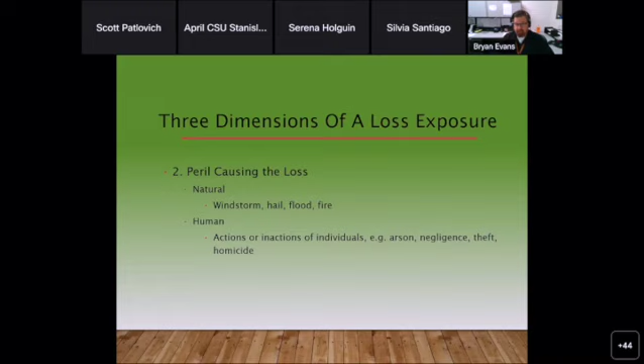And then the third dimension, what's the financial consequences of the loss? What's the frequency and severity of the occurrence? One rule of thumb is that typically the more severe, the less frequent that it happens.

So the second step is to look at your risk management alternatives. You can look at doing a risk control or a risk financing method. So risk control, you can find a way to just avoid the exposure altogether, or to reduce that loss. Some companies will separate their exposures, especially large companies.

One that comes to mind is Toyota, where they have different manufacturing plants in different parts of the world. So if one plant goes down, they can easily start up that other plant, so they're not totally out of business.

Risk financing: you can retain your losses, expensing them as they come up through either an unfunded reserve or a funded reserve, which for a few years we actually had. With my detailed spreadsheets showing every single loss that's happened, we were able to determine what our average retained losses were for each year.

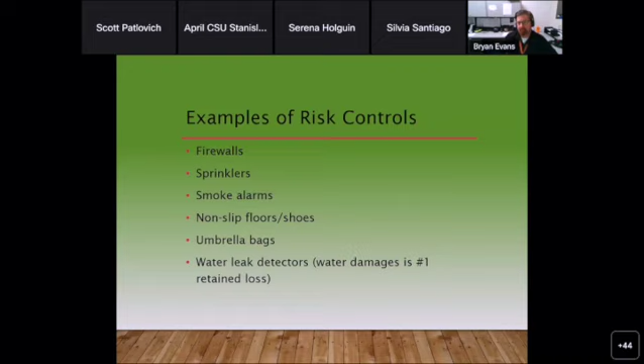These water leak detectors aren't just a local alarm—they actually call and text people that something's happening, so someone could have got to that building and shut the water off.

Okay, so types of insurance and coverages: some of the basic ones you have are commercial property, boiler, machinery, crime, general liability, business auto, workers' comp, D&O which is directors and officers, and employment practices liability. At the end of this presentation I have a graph showing how big or small each premium is of those.

Okay, the third step is selecting the best alternative. How would you go about that? You would look at financial criteria. There's a lot of other criteria to look at—what's best for your people, what's best for the bottom line—and then applying that criteria through risk control and risk financing.

The fourth step is how to implement. When to implement is a big part of it too. Do you do it over the summer when not many students are around? Do you do it during the holidays when no one's around?

And definitely you have to think about communication. For example, you can't just go self-insured on a policy without letting a lot of people know, and of course letting them know why you would do that.

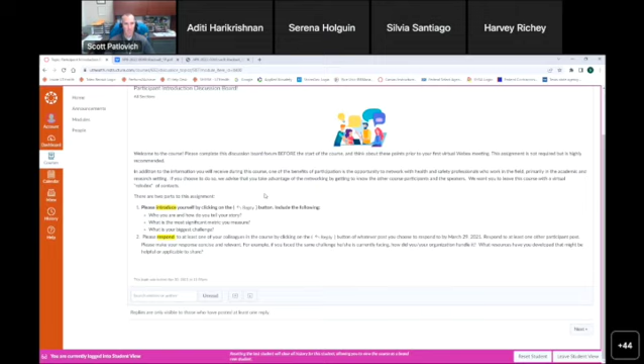Go back one step. If you go to the participant introduction discussion board, you can actually put an introduction here and introduce yourself. Just tell us a little bit about yourself, where you're from, and something fun about yourself. It'd be a good way to get people to know each other.

By the way, we have participation from folks across our UT system institutions. We have participants from the Texas A&M system, the University of Vermont, and many institutions within the California state system and others. I wanted to make sure you guys all got to know each other a little bit. So please do some introductions on the Canvas webpage so people can get to know you, and we don't leave here empty-handed in terms of adding to your Rolodex.

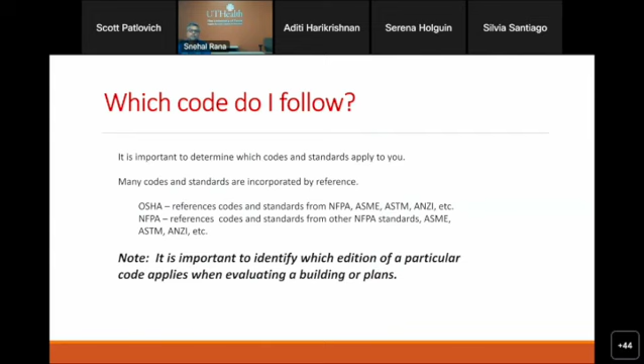So how are codes enforced? Codes are important to keep everyone, property and persons, safe in the areas that you're in. Many codes and standards are adopted or incorporated by reference by the AHJ, or authority having jurisdiction. Here on campus at UT Health Houston, we, EHS, are the authority having jurisdiction, so we have the final call on a lot of these codes.

Remodeling or new construction plans must be approved by the AHJ prior to starting work. It's a very important process when you have construction that you are working closely with any new construction or remodeling to make sure that they are staying within code. A lot of contractors are trying to complete whatever project they're working on in as quick and efficient a manner as possible, and sometimes that means circumventing code. That means they may not take the additional time to turn a sprinkler head the right way or make sure a wall is placed appropriately to provide adequate sprinkler protection.

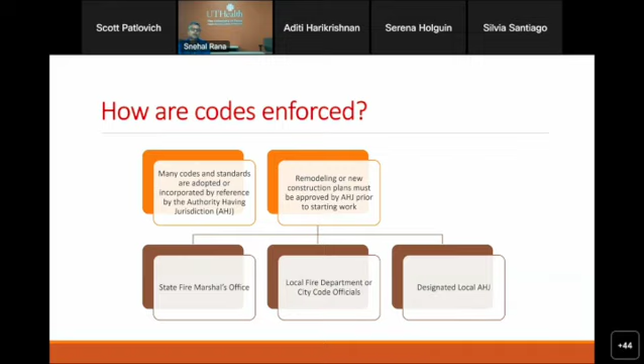Those are things you're taking a look at when working with contractors in new construction and remodeling. So as a local AHJ, you want to make sure that you are enforcing and encouraging individuals to follow the correct code. Local city officials and the state fire marshal will also come through and enforce code when necessary.

Additional code requirements - all codes are minimum requirements, so you want to go above and beyond in some cases. In some cases, that's not really possible or it's unnecessary, for example if it's cost prohibitive. For example, we do have a building on campus here - an older building that does require sprinkling. However, we are probably not going to get that sprinkled anytime soon because the cost is just very extravagant.

So we are in the process of building a new housing unit that will have a fully sprinkled system and everything like that. It doesn't mean we don't have fire alarms in place. It doesn't mean that we don't have fire extinguishers readily available, but it is not a fully sprinkled building per code.

So when we do build it again, we will comply with IBC and NFPA and have it fully sprinkled. Also, insurance company requirements, institutional policies, Joint Commission - so if it's a hospital, the Joint Commission - and then additional state and or city requirements that are necessary for that particular area that is requiring additional code enforcement.

Features of building fire and life systems: alarms, sprinklers, standpipes which provide water to the sprinkler systems, fire pumps, rated corridors, walls, exit access, signage, number of required units or exits, egress widths and pathways, occupant loads - so how many people can be within an area - elevator recalls, fire rated doors and frames, and fire extinguishers. All these are features of building fire and life systems, and there's probably a few that we're missing on this particular list.

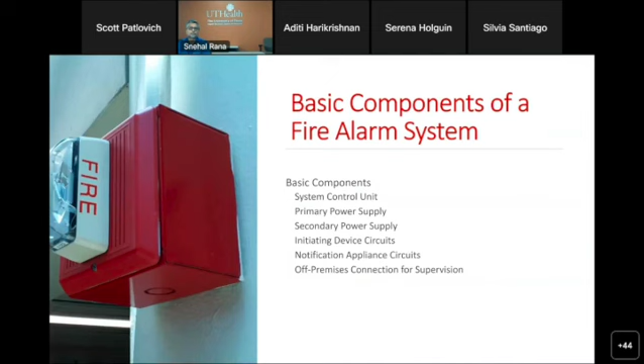So the primary power supply is going to be the one that's wired into the wall, but you're going to need a backup in case power fails. When you have a backup power supply, that battery needs to be maintained and replaced if it fails for whatever reason.

Now you have different initiating devices which will set the building into alarm: smoke detectors, heat detectors, fire alarm pull stations, duct detectors. Then to alert everybody within the building, you'll have different notification devices like a horn, a strobe, a bell, a PA system announcement, or a horn strobe. So you'll have different types of devices which will alert individuals.

And then the control panel will relay a message to whoever is offsite so they know there is an alarm. For example, our buildings here are 24/7 monitored. They're all fully sprinkled, but in the event a fire alarm is activated, we get a Metasys alert, as they call it - a notification on our cell phones, and we also get an email. Once we get that alert, UT Police will also get an alert or notification. We'll talk about this more during fire alarm response, but there is a process for notification and communication.

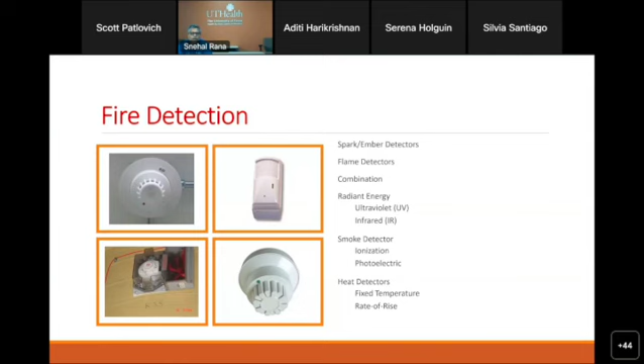Another way to set the building into alarm, not only the fire detection systems, but also the manual pull stations. Manual pull stations will generally be located near the exit signs or exits of buildings, and these are activated by pulling the handle itself. If you've never activated a fire alarm pull station, next time there's a fire drill, I encourage you strongly to at least do it one time. It's a different experience, and it's pretty cool because you can set the building into alarm, but you normally can't.

Unfortunately, recently we've had some individuals in different schools - for example, we have a dental school, and we had a younger individual just pull the fire alarm pull station, set the building into alarm. Obviously it causes disruption, but we know it worked. The device sends a signal to the building's fire alarm system, which places the building into alarm.

Again, once the building fire alarm system is activated, everybody within the building or within the floors adjacent to it - I'll explain the high-rise fire alarm notification a little later - but once the fire alarm is pulled, the building will go into alarm, and also the police or whoever the monitoring system is that you guys use will receive an alert as well. Notification appliances - there are different ones.

For example, for the public announcement, audible must be 5 decibels above any ambient noise that lasts 60 seconds or more. And so it just depends on how loud the space is. If it's a quiet library, it's going to be much quieter than if it's an industrial environment where there's a lot of hammering or machinery.

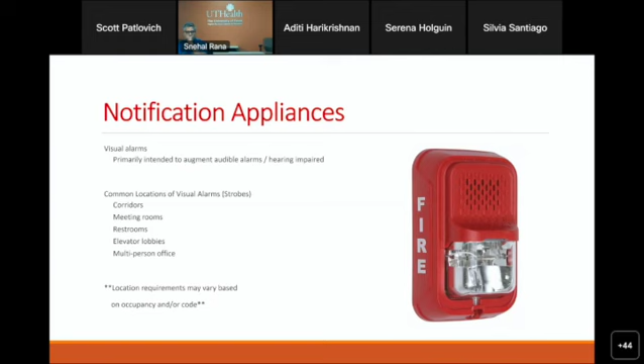So, fire alarm system interfaces. All these are very important features of a fire alarm system interface. For example, the HVAC air handler shutdown, duct detectors work to shut them down if there is smoke that's captured by the detector itself. It'll also shut down the fire and smoke dampers, so smoke is not filtered throughout the building.

Sprinkler water flow alarms: if a sprinkler head is activated by high heat, meaning there's a fire, that will put the building into alarm. Also, magnetic lock release - if you have mag locks on a door, these will fall out to allow people to pass through. Door unlocking devices, elevator recall, stairwell pressurization to prevent the fire stairwell from getting smoke in there - those are only 2-hour rated.

And then also roll down doors, and those are tested regularly to prevent smoke from either getting into an area that needs to have a separate smoke compartment, or to keep a stairwell free and clear of smoke.

So some of the key elements of a fire and life safety program - there are additional ones out there, I'm sure - but some of these are very, very important, and some are more important than others. Partner with your key stakeholders. Understand the needs in relation to your research, teaching, and compliance.

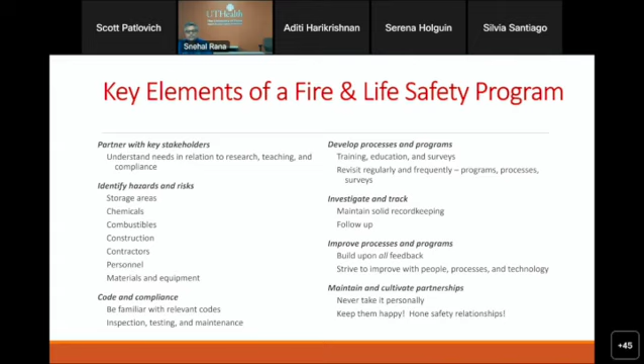In summary, codes drive facility fire and life safety requirements. Know what codes apply to your operation. All codes are minimum requirements. Know who the AHJ is—they carry a lot of weight when dealing with codes. Maintain systems in accordance with code compliance requirements and manufacturer's recommendations. Sometimes compliance may be for Joint Commission, and we want to make sure we're complying with them, or it could be with another governing body we want to follow through with.

Aside from that, Scott, if you have anything to add, sir? Yeah, great presentation, Snehal. I'd open it up for anybody to chime in now with any questions or discussion about this introductory presentation on fire and life safety.

I will say that these basic functions and features of buildings are very important to understand as a safety professional, regardless of your specialty area. These are probably some of the more universal skills and information you can carry with you, not just in the academic setting but any setting. So I'd encourage you to learn the basics of fire and life safety within your organizations. If you don't already understand these things, this is all very important stuff.

We expect all of our safety professionals to participate in fire alarm response because Snehal and his team of experts can't be everywhere all the time. So we share that responsibility among all of our team members within our department. If somebody in our chemical safety, biosafety, or radiation safety program is in a particular building and the fire alarm goes off, guess what—they're responding to the fire panel just as if they're in Snehal's group, to do the basic things to triage what's going on, make basic announcements to building occupants about what to do in the event of that alarm, and call in to our UT police or otherwise as necessary, depending on the situation. Really important skill sets here.

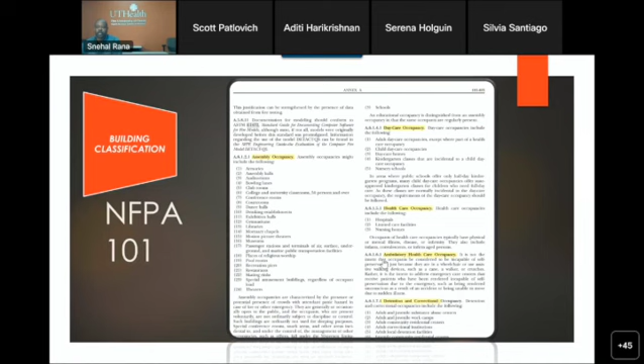We're showing the different sections that building classifications can fall into in NFPA, and being sure to classify a building correctly is important. You want to make sure it's the right classification, as occupancy classification drives the requirements for the different life safety features.

These features are unique and expected characteristics for the anticipated occupants. If you don't classify a building correctly, you can over or under apply necessary code requirements.

Some examples of the occupancies we have here on our campus: we have assembly occupancies, used for the gathering of 50 people or more, characterized by people falling into a herd mentality during evacuation.

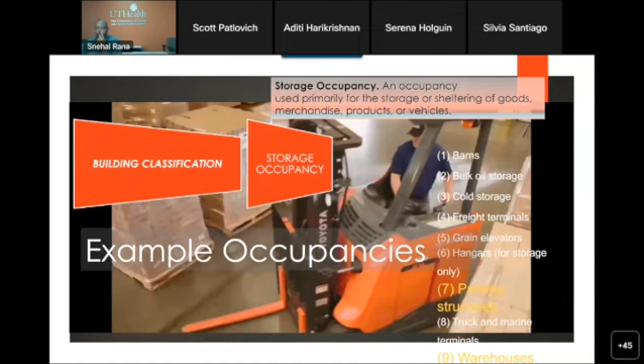Another occupancy we have is storage occupancies, seen here in the parking garage. Parking garages store cars and vehicles, so they're considered storage, along with warehouses, and warehouses speak for themselves.

Another one really prevalent on our campus are business occupancies. This is an occupancy used for the transaction of business other than merchandising.

Here it shows that we have 15 classifications that a building can fall into, and you can see the different kinds such as healthcare, residential, board and care, detention, and educational.

Something important about educational occupancy is that it only refers to schools from kindergarten through 12th grade. College, universities, and above the 12th grade level are considered business occupancies.

Once you get the building you're inspecting identified and classified, you'll notice that most buildings have what's called mixed occupancies, such as our Institute of Molecular Medicine building, where on our upper floors we have laboratories and business offices, classified as business occupancy. And then we have conference room space and a large auditorium, which are assembly occupancies. So it's one building with mixed occupancies.

When you have a building with mixed occupancies, there are two options you have to follow according to NFPA Chapter 6. One is to abide by the most restrictive requirements out of the occupancies, or you could use what's called separated occupancies. Most commonly, you'll see this in storefronts where you have different occupancies in one building, separated by firewalls between each type. In my opinion, this is the safest route to go.

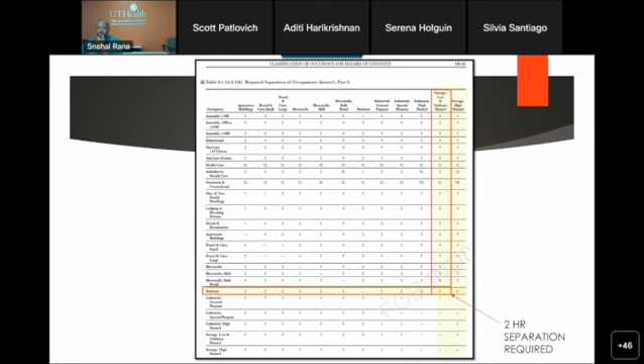Next, go through the hazards of content. Every building has incidental space in every type of occupancy. Shown here on the southern part of this floor plan, in the building we're actually officed in, you'll have rooms such as mechanical rooms, high storage rooms, or a print shop that stores different flammable chemicals inside a business occupancy. So you have to identify those spaces.

Once identified, you have to classify those areas as high, low, or medium hazards. Depending on what's in there, you may have to separate them with fire-rated construction, or just have sprinkler systems, but if it's a high hazard, you'll have to have both fire-rated construction and a sprinkler system. The classifications are low hazard, ordinary hazard, and high hazard, and they're all found in your occupancy chapters.

So in conclusion for the first part, Chapter 6, classification of occupancy and hazards of content: in NFPA, first you want to classify the space you're looking at, then determine separation requirements—are you going to use mixed occupancies or construction separation—and then identify and separate any hazardous area.

Looking back at the Station fire, if they had been able to actually separate their assembly area from the business area, it probably would have bought a lot of people more time, as the effects of the fire would have been stopped by a separation barrier, giving people more time to get out and also giving the operators time to unlock the doors.

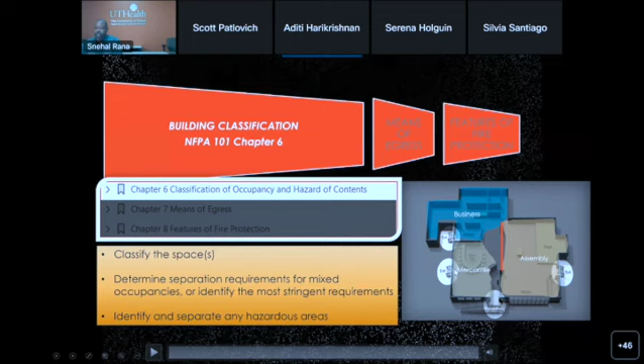So next we're going to go through the means of egress. Means of egress is Chapter 7 of NFPA, and it's basically about evacuation—the withdrawal of occupants from a building safely. We'll first go through the different components of egress, such as the doors, how wide they have to be, and the minimum leaf width.

They'll also talk about floor level in the means of egress, how much force you have to apply to open the door, and the swing direction of the door—when it's required to swing outward versus inward—and then the different locks, latches, and alarm devices allowed on egress doors.

Next, it'll go through the capacity of the means of egress. They want to ensure sufficient egress for the occupant load in the building. The occupant load is generally found by applying a formula: you take the square footage of the space, the type of space, and then use the factor numbers given in NFPA's chart.

You divide your factor number into the square footage. It'll give you a total number for each space or each occupancy type. You add those numbers together to give you a total occupant load.

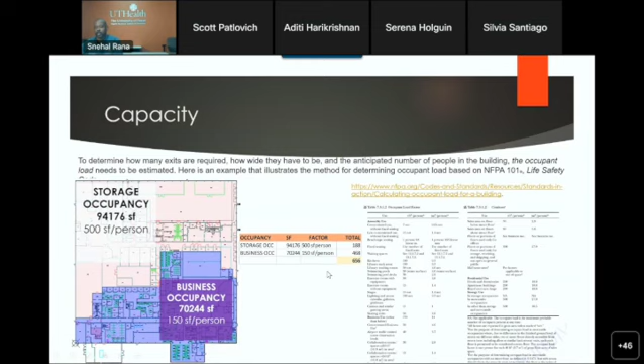Once you get the total occupant load, you can go ahead and apply these other charts and rules that'll tell you the number of means of egress, or how many exits you'll need based on how many people are in the building. Then it'll tell you how wide those different exits have to be according to your occupancy numbers.

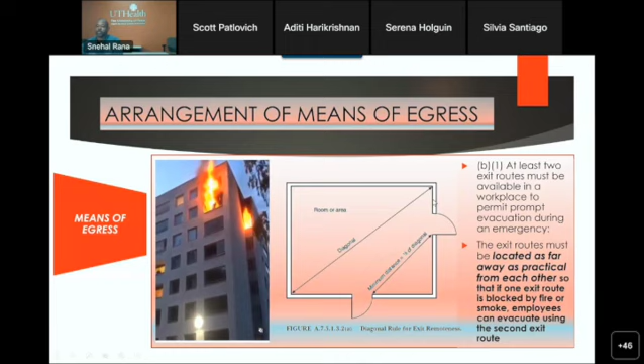And then it'll go into the arrangement of egress. So once you know how many exits you need, it's going to be arranged so that one fire can't block a person from getting to either one of the exits. So they'll have you go through the rules of how far apart to place the exits.

And then it'll go through how far a person has to travel to get to those exits. And then those sets of rules talk about how long a dead end can be based on the building, such as in a business occupancy, where the dead end can't exceed 50 feet.

Then it'll go through what's really important and could be overlooked easily, the common path of travel. Basically, how long do you travel before you have two options to get out of the building. So in business, if the building is sprinklered, you can't travel more than 100 feet before you reach a point where you have two options to get out of the building.

And then the overall travel distance, in a business occupancy, can't exceed 300 feet. So you have to go to your different occupancy chapters to see what their rules are for the travel distance and the common paths of travel in dead-end corridors.

Next, Chapter 7 goes through exit discharge. You don't want people to get to the final exit door and get trapped in a small yard. You want them to be able to get to a safe distance away from the building so that the firefighters can respond in the way that they need to respond.

Next, Chapter 7 goes over emergency lighting. It goes over exit sign locations, and then it has special provisions for egress in hazardous areas, such as rooms with hazardous contents or hazardous materials, mechanical and equipment rooms, and also unoccupied building service equipment support areas like roofs and large spaces where an entire floor is a mechanical room.

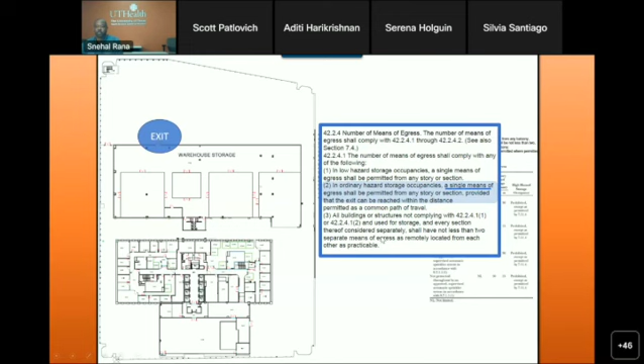But when we changed that same space to a university program, now we have office suites and cubicles. The requirement you'll find in that occupancy chapter is you can't have less than 2 separate exits on every story. So now, for this section of the building, we only had 1 exit in the beginning, but the architect decided to connect to the existing building, so now he would have 3 exits he can use.

The question was about dormitories. What was the question?

For dormitories, there's a specific occupancy chapter that covers dormitories. I would have to switch back to, say, the board and care chapter, or for an apartment building, there's an apartments occupancy chapter. So you would have to read through the occupancy chapters to see the rules for that.

Back to the office space, you have to have not less than 2 exits. So the architect opened it up to the existing office space, and it looked like he had 3 exits. So it looks like he met that rule.

When you looked at the travel distance for the space, this is the common path of egress, one leading this way, one leading to the existing exits. But you remember the common path of travel should not exceed 100 feet. So 100 feet in this building only went up to maybe around this area here before they could actually get to a spot where they had 2 ways out. So it didn't meet the code, or at least trying to use these 2 exits didn't meet the code.

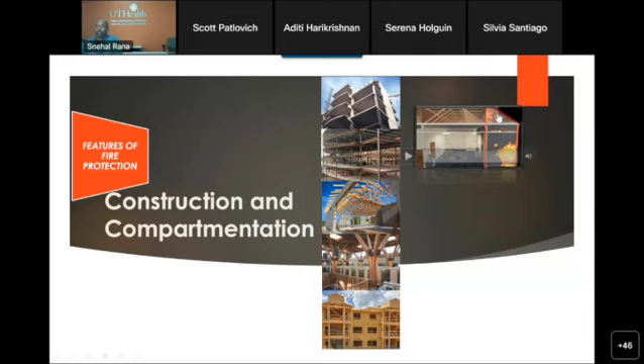So now we're going to the features of fire protection. This is our final section. Features of fire protection basically goes over the construction and compartmentation of a building. The construction basically shows what types of construction materials can be used, and compartmentation is how to contain a fire in one part of the building. So that gives time for other people to egress.

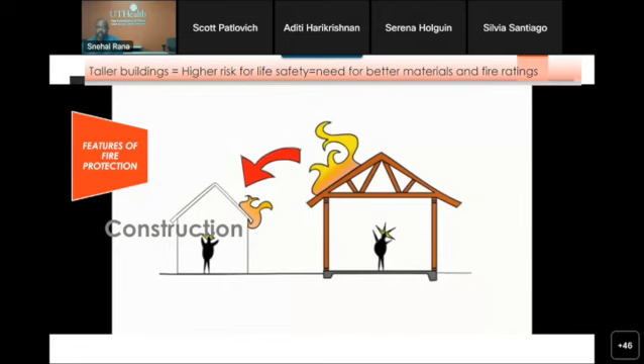But since you're only expecting a small amount of people to egress out of there, the code still allows for wood construction for a house. But if you try to build a 30-floor tower out of wood, the fire will spread too fast, and once it spreads, you won't have enough time to get everyone out. So you have to have better building materials such as steel and concrete construction.

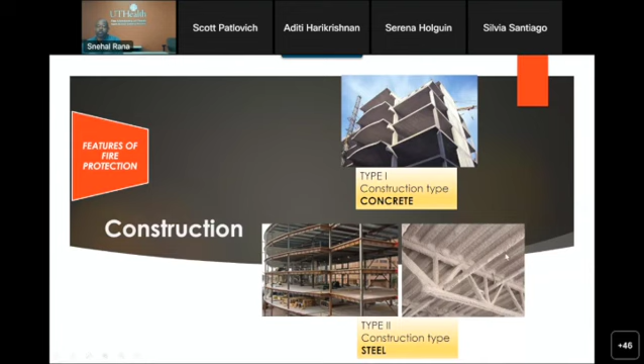So Chapter 8 refers you to NFPA 220. Every building has to comply with one of the building types found in NFPA 220. In a nutshell, you have types 1, 2, 3, 4, and 5. Type 1 construction is concrete, which is really robust against fires. Then type 2 is steel construction, and the steel could be either protected, as you see here with fire foam, or unprotected, where the steel is just standalone. Next, type 3 construction is a building used with partial wood. Type 4 construction uses laminated wood for stronger beams, and regular type 5 construction is just your basic lumber construction.

So see how this applies in code. If you go to the healthcare occupancies, they'll have a section called construction type limitation. On the left, it's going to show you what construction type building has been referenced, and then it'll show you the floors, how many floors you could build using these types. So if you see a type 5 building, it's going to be all wood, and NP stands for not permitted. So you'll see that for healthcare occupancy, the code does not permit wood to be used.

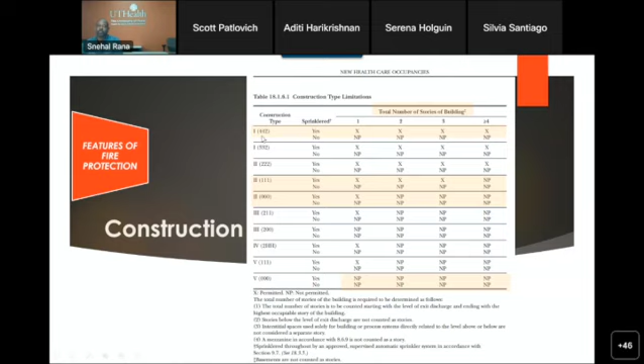If you go to the steel construction, unprotected steel says you can build up to 1 story, but you can't build above 1 story. Then if you protect the steel, you can build up to 3 stories, but you can't go up to 4 stories. And if you build out of type 1, which is concrete, then you can go above 4 stories. So basically, the better the building material, the more lenient the code would be.

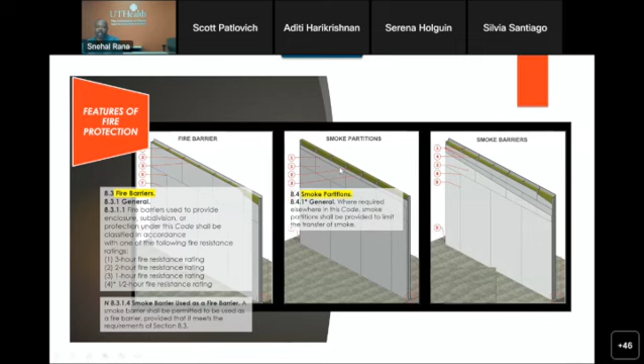Firewalls come in three different examples. You have fire barrier walls, which are usually rated to resist fire for 2 hours or more. Then you can have something as small as a smoke partition, which may have some fire resistance rating, but not much - it's mainly provided to resist the passage of smoke. And then you have smoke barriers, which are generally 1 hour rated.

Out of these three, even though they look the same, I call smoke partitions the Toyota class. The smoke barrier, since it holds fire back for 1 hour, is the Lexus class. And fire barriers are really robust, so they're the rich Mercedes class of walls.

Just to show an example of this in code: in business occupancies, a fire barrier must be provided between parking structures and business occupancies. The code requires a 2 hour fire resistance rating - that's going to be your fire barriers, or your Mercedes.

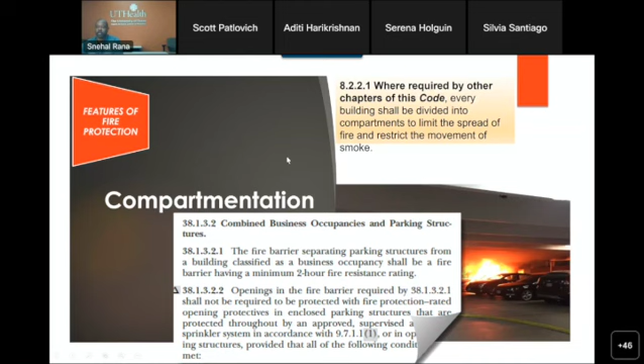In healthcare facilities, depending on size, all floors have to be divided into at least two compartments to limit fire and restrict the movement of smoke. If you go over every 22,500 square feet of healthcare space, you'll have to provide a smoke compartment.

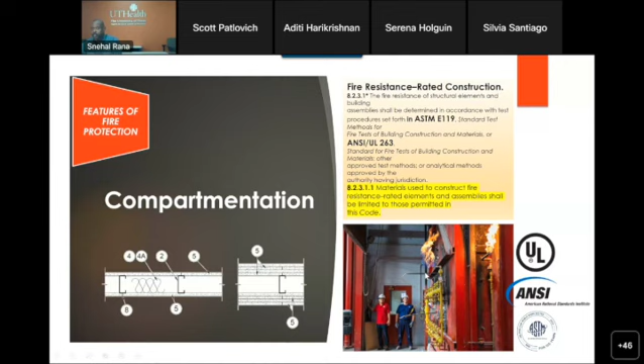Now, these walls that create smoke compartments cannot just be designed and constructed based off of a contractor's own discretion. You have to make sure the contractor is following a wall system approved by ASTM, ANSI, or UL. These organizations send these wall assemblies through various fire tests to make sure they can perform in the way we expect them to perform.

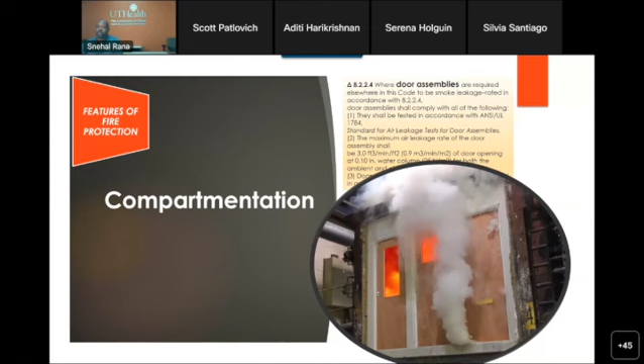These rules don't just apply to walls, but also to floor construction and roof construction. They also apply to the fire doors found in these walls, which have to go through leak tests to make sure too much smoke doesn't pass from one part of the facility to the next. It also applies to elevator shafts, sometimes enclosed elevator lobbies, atrium walls, corridors, and even the windows in these spaces.

Next is special hazard protection. We already talked about compartmentation - special hazard protection means if we're storing something in an area that has a higher hazard than the rest of the clinic, you would want to protect that area with fire-rated construction as well. Depending on what's inside each room, you want to make sure these rooms are enclosed with fire-rated construction, sprinkler coverage, or both if it's a high hazard.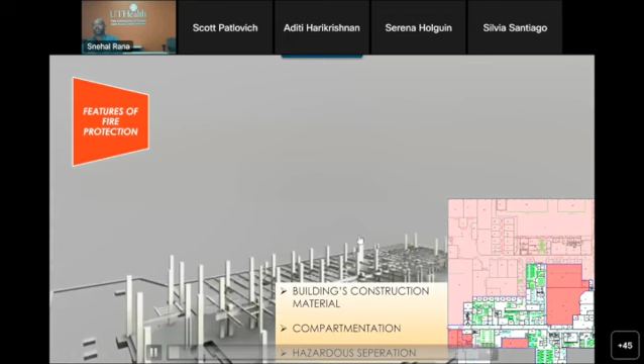So in that chapter, we talked about building construction materials - concrete being the best material all the way down to wood. We also talked about compartmentalizing an entire building, and hazardous separations within a building.

To apply this, I can show some results of an inspection I was doing. This is the building that we're housed in - the office portion is on the south, and the top portion of the building is a storage occupancy. So I have business occupancy down here, storage occupancy up here, with a 2 hour wall that goes around the storage occupancy, separating it from the business portion.

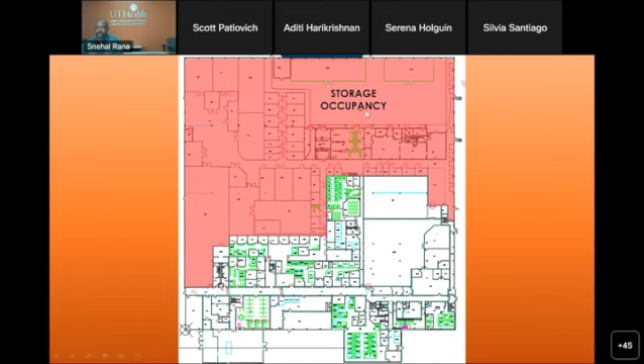But inside of the storage occupancy, there's another business section used for offices, actually inside the storage occupancy. This is a picture of that office area - you can see it's made of CMU walls or concrete walls, which gives good fire separation. But as I was doing my inspection, I looked at the roof, and it didn't seem too convincing that it had the correct separation.

So I went in and looked above the ceiling, and I saw that we had unprotected steel there. So as I went to the code, it says we were supposed to have a separation between these two occupancies, and the separation had to be vertical, which is the wall, and horizontal, which is the roof. Then I went to the chart in chapter 6 and saw that the separation requirement between a business and a storage occupancy is actually 2 hours.

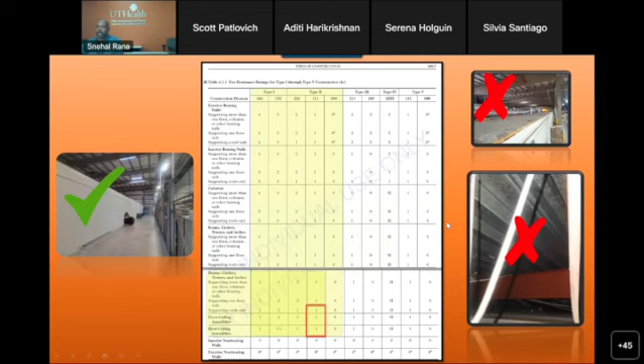Since both occupancies are sprinklered, it's actually reduced to 1 hour. So I did a little checking and found out that our walls are fine since they're constructed with concrete, but the roof is not compliant. So instead of trying to put on a new roof for this area, we basically mitigated the situation by keeping high storage that would compromise the roof away from the office area.

So that's the back wall. You see the high storage racks have been removed, and that's typically how the storage is in the area. But another consideration, remember, we had 2 options: we could do separated construction or mixed occupancy construction.

So we're trying to shoot for mixed occupancies, and under mixed occupancies, you can see here the architect provided 4 exits, and this area right here is used for lots of storage all in this area. So when we check the travel distance from the backmost remote area, we found out it meets our travel distance, but there's a gate here.

The gate can be locked at any moment, so it's not a dependable egress route. Also, when you try to go to the other exit, it's too far—the travel distance exceeded 300 feet.

And then when we looked at the common path of travel, which is under business occupancy versus storage occupancy, the common path of travel exceeded 100 feet. So we could not use the mixed occupancy rule without making some changes.

So the changes that were made: we reduced the amount of storage that we had in that area and opened up a pathway to the top, this north exit here. So now once we have the north exit provided, we have a new route that could be used that met all of the rules and criteria for common path of travel.

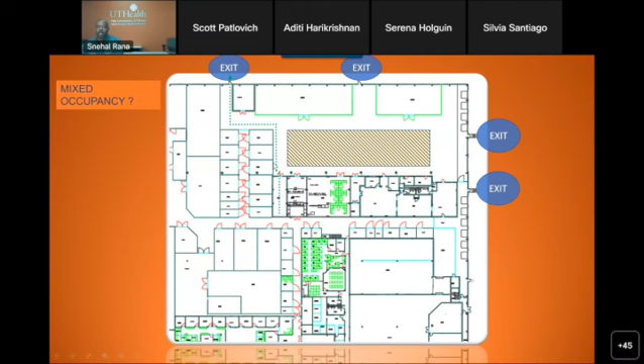As soon as you step out the door, you'll have 2 ways out, and this is within the 300 feet required. So we're able to use the mixed occupancy rules just by reducing the amount of storage.

So in conclusion, we went through building classification, which is really important, the first step that you should do. We went through some of the means of egress requirements and started giving you the concepts for features of fire protection, which is how a building is going to be constructed. This is going to apply to alterations, renovations, inspections, plan reviews, and emergency planning for your buildings. So do you have any questions before we move on to our next presentation?

Cedric, excellent job. Any questions or discussion points? Cedric literally is a wizard with these presentations, as you could see. Cedric, we do have a couple things in the chat.

One of the questions is, are university teaching labs and research labs both considered business occupancies? Yes, so those are going to fall under business occupancies. If the research lab has such a high amount of flammables, it could actually be considered an industrial type occupancy, but if it's just a normal amount of lab work, then it's usually going to fall under the business occupancy.

Another question is, will evacuation elevators be required of new buildings, or would it be something required of all existing buildings to add? Yeah, so it's going to apply to existing buildings and new buildings, those requirements. So you go to the occupancy chapter, and under the occupancy chapters, I'll use business occupancy as an example—you have a chapter for new business occupancies, then you have a chapter for existing business occupancies. So if it's an existing building, you look under the requirements for existing building occupancies and just follow the rules there.

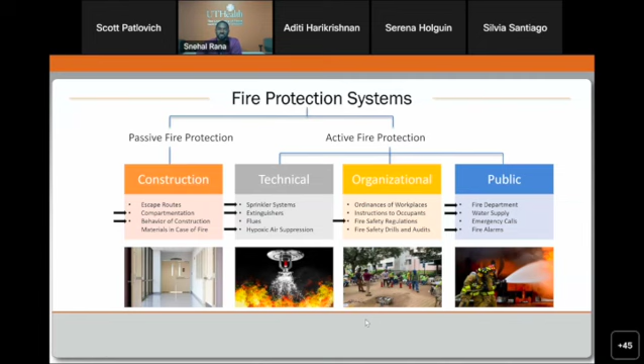So as far as our active fire protection systems are concerned, there are at least 4 things I'm going to discuss: the firefighter's role in this, the sprinkler system, the detection and alarm system, and also the suppression system - specifically, the fire extinguisher, okay?

There's a threefold process, or purpose, for the active fire protection system. One is to slow the process of the fire. Of course, we want to put out the fire. And we also want to notify our occupants in the building about any fire that's in the area.

If you happen to have a high-rise building, greater than 70 or 75 feet, you're going to need a fire protection system, included in the fire alarm system, to notify individuals that there is a fire on that specific floor.

If there happens to be a fire on the 5th floor, the alarm will go off on that floor to notify occupants, but you'll also have an alarm on the floor above and the floor below. It's not just for the middle section, it's for all floors. If it's on the 8th floor, it'll also sound on the 9th and the 7th as well.

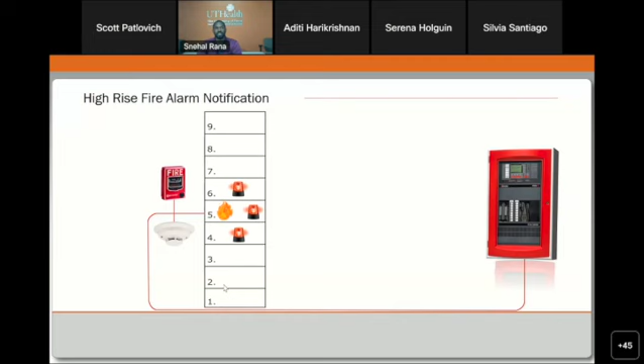This is going to get your alarm system working. It's going to initiate your fire alarm system after it gets into the smoke detector, which is part of that active fire protection, or if somebody manually pulls the fire pull station. I need to pause here and say the active fire protection side is not just automatic, but also manual. So we're looking at actions of different sorts, and as that occurs, other actions happen as well.

Just want to give you guys a glimpse of what your offices typically look like here. In a normal situation, if the fire goes off, the system already has everything in place. The wet pipe sprinkler system has water that sits on the system, period. I'll talk a little more about why I'm discussing this the way that I am.

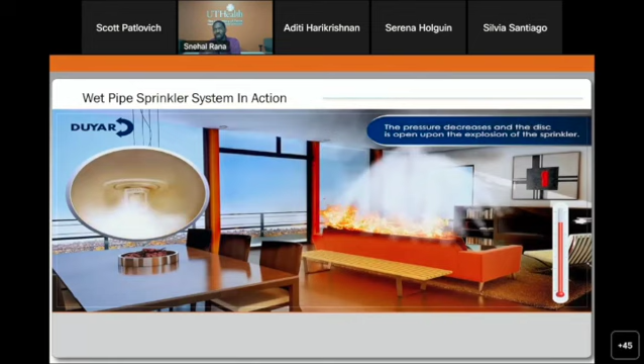As the water sits in the piping and the fire initiates on that specific floor—this is not like Hollywood, and we'll talk about that shortly—the specific sprinkler impacted by that fire is going to go off. When that happens, within a 90-second period, there's a chamber that fills up to ensure that the fire is also alerted to the rest, with the alarm alerting the rest of the occupants in that given space.

So you have your conventional type of sprinkler, your upright sprinklers. They're used in specific cases. For instance, if there are renovations going on, there are times you need to take your typical pendant type sprinklers and turn them upright so they can help cover everything in that given area.

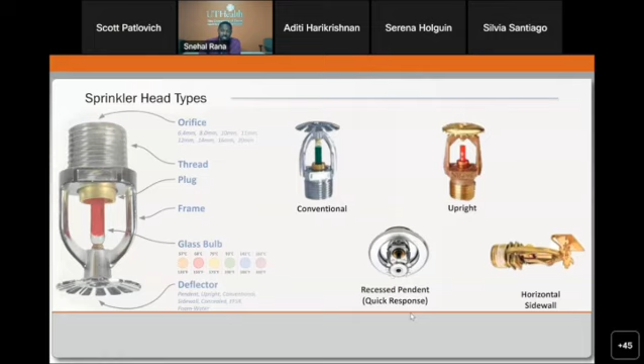We have our recessed pendants. We even have sidewall pendants. Your typical pendant, as I discussed earlier, recessed pendant type, and horizontal sidewall. And this is probably some of the ones you're accustomed to seeing as well, which is your concealed pendant type.

These are the ones I was saying are 135 degrees Fahrenheit for this particular count, but the actual bulb inside should go up to 155 degrees Fahrenheit. Some others you'd find the sprinkler with different colorings that would go in mechanical spaces with a higher temperature rating, like garage areas. It just depends on the specific function you need the head for.

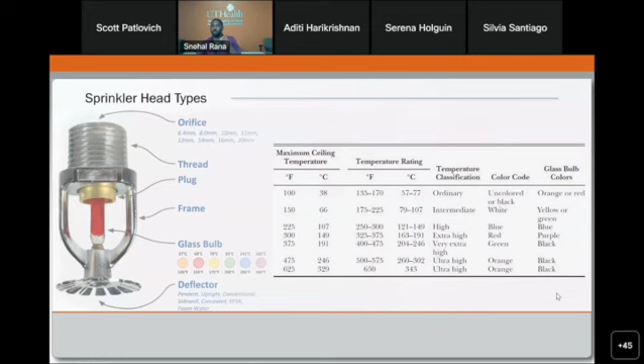This is just a handy chart that you'll find over in NFPA 25 or 13, and it'll give you all the specific colors specific to that sprinkler head type. So just moving on, I talked about the manual means by which we can help to put out fires.

If you happen to have a training program in place where you are training your occupants to use portable fire extinguishers, this would be a great way to help educate not only your people in-house, but also those outside.

NFPA 10 is the standard we use for portable fire extinguishers. To identify some of the hazard occupancies, we have light hazard, ordinary hazard, and high hazard. You can see they have specifics to those given hazards there.

Offices, schools, assemblies, all of that falls under light hazard. Just a little quick something to talk about the different types. So you have the kind that we would usually see across our campuses, the ABC type. Now, the A stands for the original ordinary combustible fires.

That's for your wood, your papers, your cloth. Flammable liquids would be your B type extinguishers. C stands for the electrical type. D is for your combustible metal. And then you have your commercial cooking equipment, which is your K type extinguishers. You usually find those in the larger silver looking fire extinguishers. These are all usually found in your kitchen areas where there are grease fires.

Just for a little operation of how these go, I know that you've passed this on to a lot of your occupants, the handy dandy PASS acronym that we throw out there to make sure we can remember the function and operation of our fire extinguishers. So prior to use, it's always good to make sure everyone's looking at the gauge, making sure it's not undercharged, not overcharged, but rather that it's within the green.

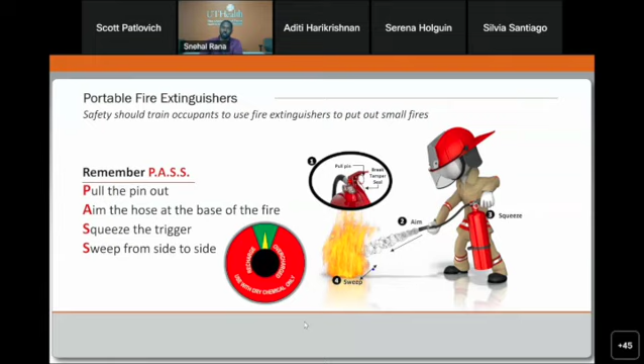So our first step is we want to pull the pin. Our second step is to aim at the base of the fire. The third step is squeezing, and that last step is sweeping, which is essential to making sure that we extinguish that fire out at its core.

Also, just in case we don't have water from the city or anything of that nature occurs, we have backup water in place in order to help continue to feed the fire protection system, the fire sprinkler system.

So now it's very good, it would be very helpful, of course, if you're around your campus and you know your campus very well. Why? Because there are some times when we have combination systems where the wet pipe system feeds into the standpipe, and there are times when they are separate. So please know your system.

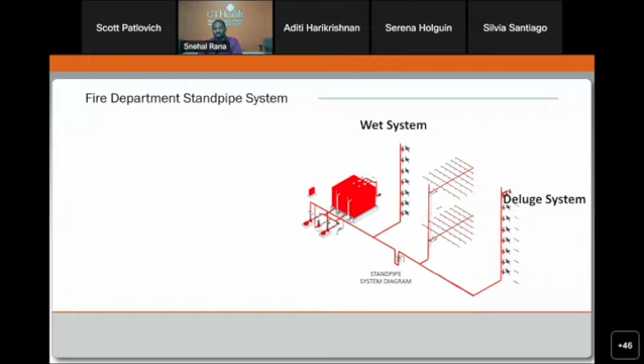You don't normally see these on our campuses. This is probably the closest thing you'll see to Hollywood, because while the system has heads on it, those heads do not have fusible bulbs. So if something allows that system to go off, every single head will go off. Like I said, that's the closest thing you'll find to Hollywood there.

Looking at these hose cabinets, some typical things you'll find in them are fire hoses. You have your valve here, and the connection where the fire hose is supposed to go. Some of our buildings in the past have had fire hoses meant for occupants, but we don't have that for what's called class 1 type systems. In class 1 systems, we don't allow occupants to fight the fire, and we don't train them in that regard, because we want the fire department to do what they do. There are class 2 and 3 systems that allow for that, but generally in a lot of our business occupancies we have a class 1 type system. And then, of course, some of you may have the fire extinguisher in there as well.

So I'm going to jump outside for just a second, and you'll see how this all comes together. We have our fire hydrants in place. Many of you have your fire hydrants there, along with the valve that's not too far away from it—it should be right in the vicinity. These will be used for your fire department.

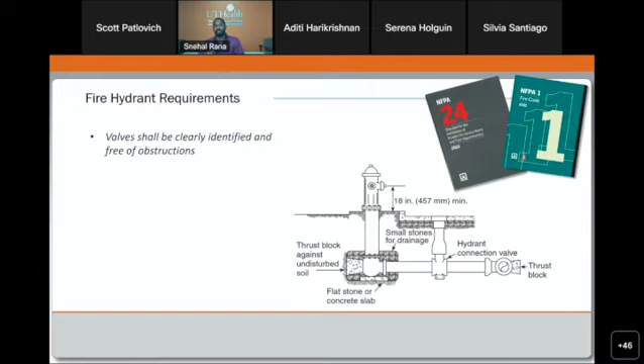So just to bring up some of the code: NFPA 24, for those of you who have private fire hydrants on your campus, is used for installation, as well as NFPA 1, so you know exactly some of the codes you need to adhere to. Valves shall be clearly identified and free of obstruction—no bushes or anything blocking off the area. The center of the hose outlet shall not be less than 18 inches, but no more than 36 inches above final grade.

We want to make sure we have a 36-inch clear space around the circumference, and the hydrants and connections shall be accessible to the fire department. I would also include that we don't want anything caught and dislodged within the fire hydrant orifice—sometimes caps can be taken off, stolen, and things of that nature.

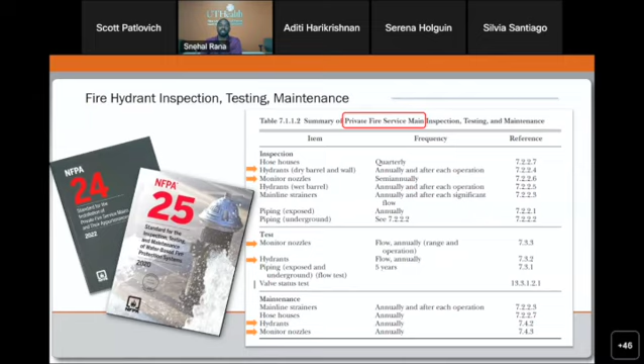For those private hydrants we talked about, sometimes we have hydrant dry barrels, walls, and all kinds of other equipment that needs to be inspected. You can do that according to NFPA 25, and this is just a handy chart to help you know some of the ITMs you can keep for upkeep.

Now, the fire hose cabinet is typically found close to your stairwells, and I believe it could be about 200 or 250 feet apart from that specific space, but definitely near your stairwells. Why? Because this is exactly where your fire department is going to be trying to go up and down and continue to fight certain fires.

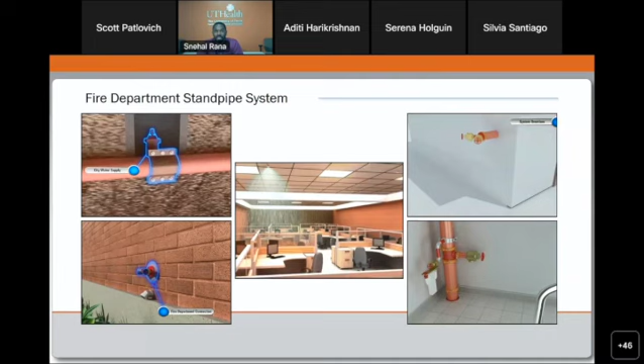So as the fire department comes to your campus, once they've been dispatched by your university police or what have you, they'll go through this process. They'll have their fire department pumper, they'll hook up to your fire hydrant, the fire hydrant hooks up to their pumper, and their pumper goes into your fire department connection. The fire department also goes to that specific floor that's taking care of the fire, they connect to that hose, and then they do what they have to do to fight off that specific fire. That's usually how the process goes.

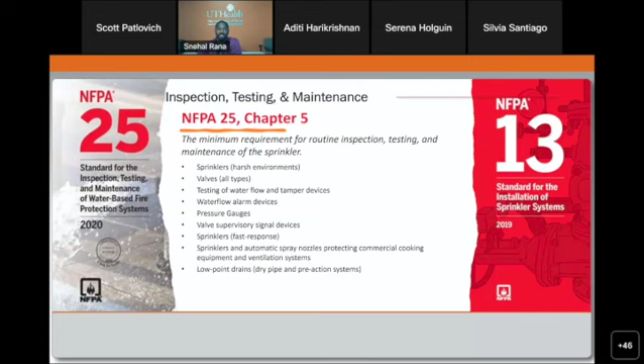So some handy dandy helpful things: NFPA 25, Chapter 5 is going to be used for helping you maintain and take care of some of the ITMs there. It goes into everything from valves to gauges, all the way to low point drains that most of us don't even give attention to. It gets into everything. For us specifically, we have quarterly inspections as well as annual inspections that we do. We just came off of our 5-year inspection, and it takes a great deal of coordination and time to make sure everybody is on the same page.

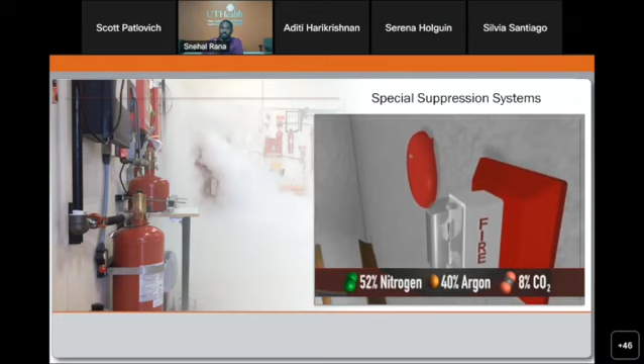Something I also wanted to mention - earlier we talked about the pre-action system that allows for air and water to be on the system. Well, for those of you who also want to take it up a notch and take care of your data centers or any kind of rare books collection rooms, we have our special suppression systems that are solely intent on taking away the oxygen from that space, which also creates a hazard for those within that area. But there are also 2 triggers for this type of system as well. This type of system ultimately has the ability to decrease the oxygen in that space, so that it takes away one leg of the fire triangle that some of you may know about - your fuel, your heat, and of course your ignition source. So it takes away that oxygen, so that it has the capacity to fight fires effectively.

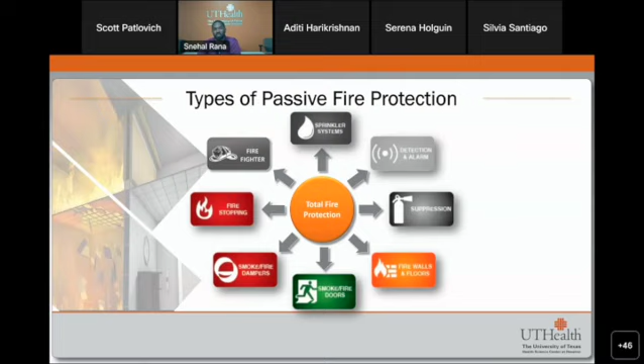Okay, so just jumping into our passive fire protection systems - some of this was a little redundant, so I'm going to talk about it very briefly and get you to some of the things we didn't discuss. We're going to talk about firewalls, smoke and fire doors, smoke and fire dampers, and also some fire stopping techniques we can use. So what is passive fire protection?

Passive fire protection is a group of systems that compartmentalize a building through the use of fire resistance rated walls, floors, ceilings, and also joints, I would even say. So this is where all of your joints are protected as well.

Just some data: the National Fire Protection had some statistics back in 2011 and 2015. The U.S. Fire Department responded to an estimated average of nearly 5,000 structure fires in educational properties annually in 2011-2015. These fires caused annual averages of 1 civilian death, 70 civilian fire injuries, and 70 million in direct property damage. Now, of course, we have all these different statistics given to us to help us know exactly what fires are doing in our buildings and to our people.

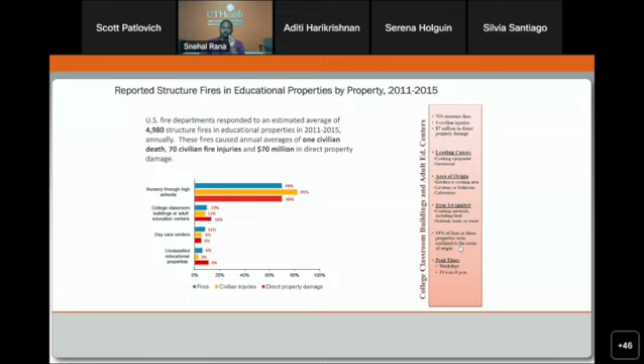But one of the big things I wanted to discuss is right over here on this chart. While it talks about everything from causes to origin, it also brings out a very important note about passive fire protection systems that we need to consider. How about this - 94% of fires in these properties were confined to the room of origin. So I would go on record and say this is because these specific fires likely were held back by passive fire protection systems.

Some of the things that Cedric was discussing earlier, construction types and materials consist of gypsum, concrete, CMU blocks, and of course our floors, which is steel, concrete, and wood frame structures. I wanted to give this to you because it would be extremely helpful if you have it on hand.

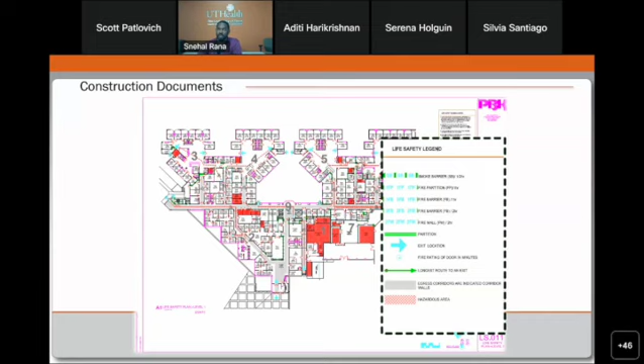If you have floor plans that are able to help you identify these specific areas, it would be great for yourself and for other safety individuals coming after you. One thing you want to ensure is on the life safety legend dealing with the smoke barrier, fire partitions, fire barriers, and identifying hazardous areas. If you look in here, you'll be able to make those links and know exactly where those rated walls need to be, so you don't have to worry about signage placed over areas that don't even need a required fire rating.

So just to talk briefly about these different types of walls and barriers discussed earlier. As we look at smoke partitions, notice they have the ability to take care of all your primary areas of egress. These don't necessarily have to be fire rated walls, but they do have to have some type of limitation of smoke going from one area to the next. Primarily we're talking about those corridors, those exit accesses that people need in order to get to the fire barriers.

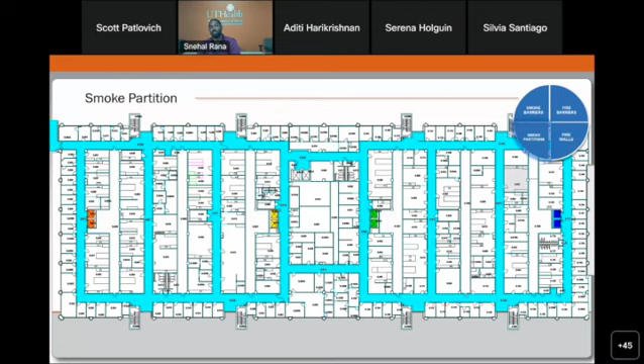It's just any type of construction. You're talking about acoustical ceiling tiles, or it can be a monolithic type ceiling made of gypsum, anything of that nature.

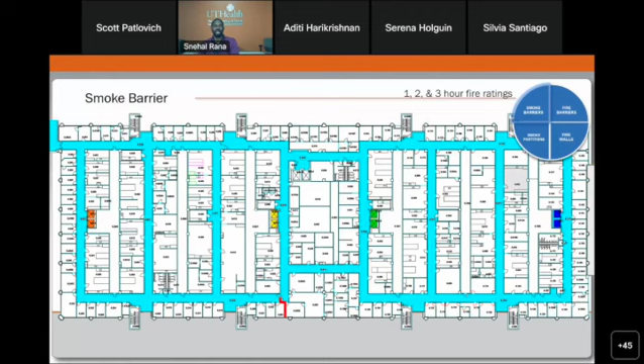What about our smoke barrier walls? Smoke barrier walls usually go from one end of the building to the other end of the building. They have the capacity of going from floor to ceiling, and they are completely fire rated, 1, 2, possibly 3 hours. As Cedric was talking about earlier, it'll continue to provide protection on one side so that people can flee to the other side and have all the time they need to exit the building or let the fire department do what they need to do.

Now fire barriers are a little different. This is actually one of our buildings on campus here. Fire barriers usually go from floor all the way to roof deck, or it may have that proper protection at the floor and also at the ceiling, as we saw during Cedric's presentation. In this particular floor plan, all of our stairwells are considered fire barriers, and these are mechanical spaces that traverse the building all the way from the floor to the ceiling. Every single wall, every single area on these fire barriers has to be protected via code.

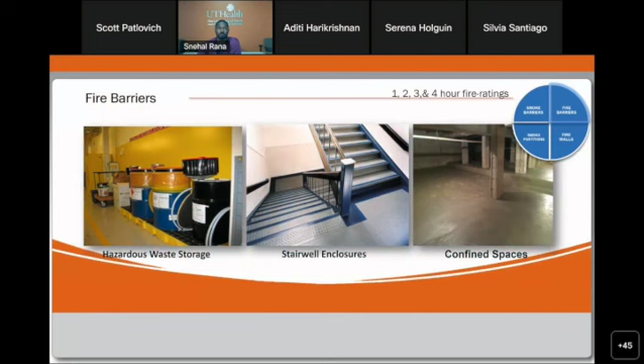So we have hazardous waste storage, stairwell enclosures. We even have confined spaces that sometimes need to be fire rated. Now over to your left-hand corner, up and to the left, you'll see these double doors. This is actually going from one building to the other building. This is what you would call your horizontal exit.

And we have right here what's called the firewalls. The reason we have these firewalls is because it's not just protecting one side of the building and compartmentalizing one side from the other side. The firewalls are usually those things going from one building to another building. I usually call these the arms of God - so high you can't get over it, so low you can't get under it, so wide you can't get around it. That's usually how firewalls are constructed.

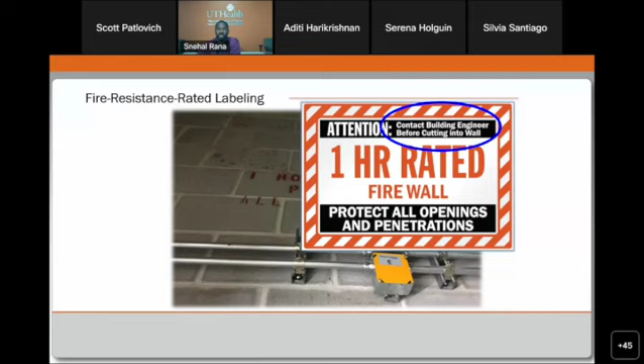And they can go all the way up to 4 hours fire rating. So as we're looking at the fire rated areas, notice that every area has to have some type of labeling so you can quickly identify it, or for any contractors who are always attentive to some of the signage we have on our walls. We usually want to have those signages in place to make sure we know exactly what that rating is, whether 1, 2, or 3.

For fire rated doors, there's all types of labeling that needs to be put on there. Sometimes it can be 1.5, 1 hour, or 3/4 hours worth. Please look for your labeling there so that it's not painted over as you're doing inspections.

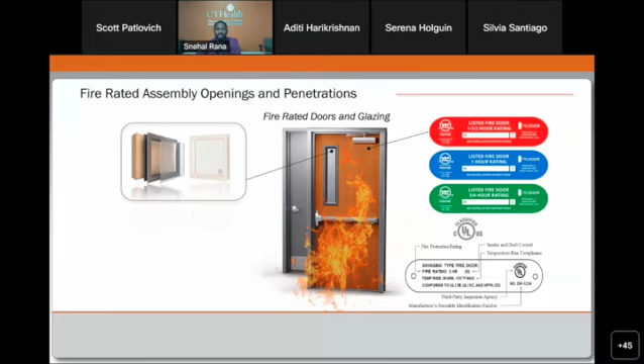This is always the seal, the classified UL listing. Whenever you see this, you know there is legitimacy to the fire rating on that door, or even glazing—sometimes you have wire glass used there. Please look for your classified UL listing. If it's not there, you're probably going to need to go back and take a good look at whether it's allowed or not. Notice that the hardware on your fire rated door has some specific type of information on it.

It may very well be something that was used on another door before, and you have to be mindful of this, because sometimes we have panic hardware, but on fire doors, it needs to be specifically fire hardware that's used.

So what about our fire and smoke dampers used in a lot of our openings? Smoke dampers are usually automatic—they trigger when the fire alarm sets off. They automatically close upon detection of smoke found in the air ductways, as the duct detectors or smoke detectors go off. We also have fire dampers that are a little different, not necessarily combined with smoke dampers. With the fire damper itself, if a fire goes off, much like with a sprinkler, the frangible bulb found there at 165 degrees Fahrenheit melts away, the door shuts, and it limits the passage of fire as well as smoke.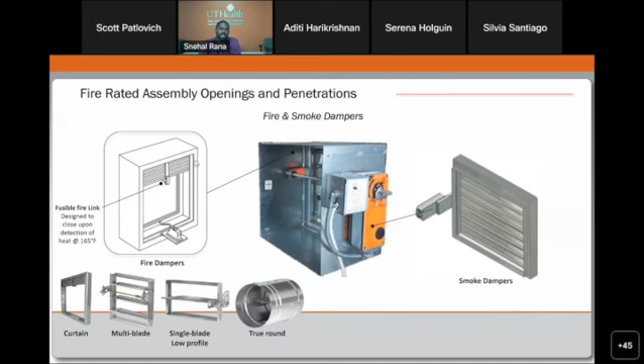There's different types—you have your curtain, your multi-blade, your single blade profile, and also your true round. These are different types of air ducts that are used. I just want to make a note: under doors, I believe it was NFPA 80 that we use as a code reference to know how to install. And for our smoke detectors and fire and smoke dampers, I believe it could be NFPA 105 as well as NFPA 90A used to know how to effectively do ITM.

So what about our fire stop systems? If you've ever seen fire stop material used in a lot of these different types of openings, you can have them from a bundled cable all the way to just random openings. Sometimes it can be just a misuse of how fire stop systems were done before. Fire stop materials specifically are tested and approved for use in specific construction details that reflect the installed assembly itself, meant to protect the rated penetrations—whether it's pipe, wires, cables, or anything like that—to the same degree as the fire-rated wall, ceiling, or floor being penetrated.

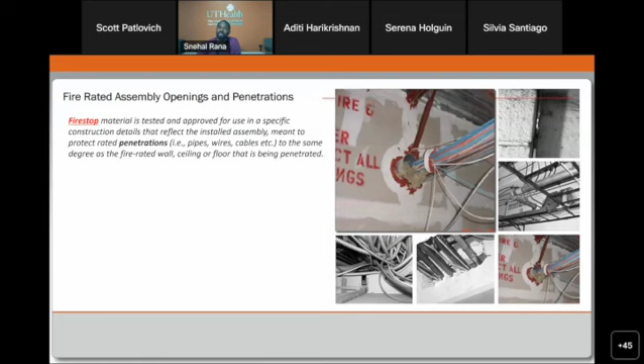Looks like we had a question there. I did miss that—I know we'll come back around to it.

So if you can see this here, this is something that we commonly found out in the field. A lot of people like to go to your local Home Depot and grab some of the fire caulking used to kind of pin up these areas. The question is, can this be used? Absolutely not. If you look on those containers, it always has a little disclaimer that says not for commercial use. And I'd also argue that it's not going to be beneficial for what we're trying to do.

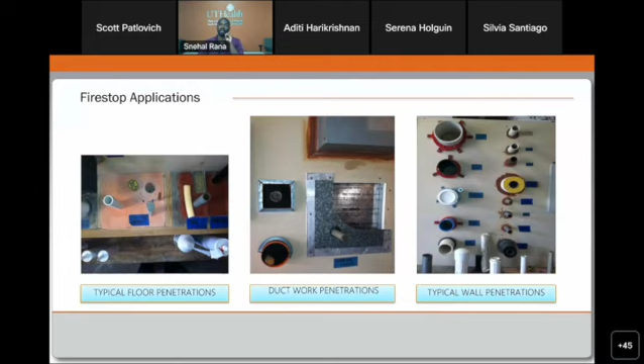Some fire stop applications—you can see there's a myriad of things here, whether it's hard piping or insulation. Every type of penetration has a specific fire stop detail, which leads me to this. I wanted to show you this to give you an idea of how some of the fire stop details are when you're going in and trying to identify specifics on how to apply your fire stop.

Can you see a lot of different colors out there? I promise you, you can—they have blue, yellow, the whole rainbow out there. Usually they don't want these to be combined. I've seen where people try to combine them, but they don't test them like that, and so they don't require you to do it like that. They would rather you not. And this is why I brought this up here.

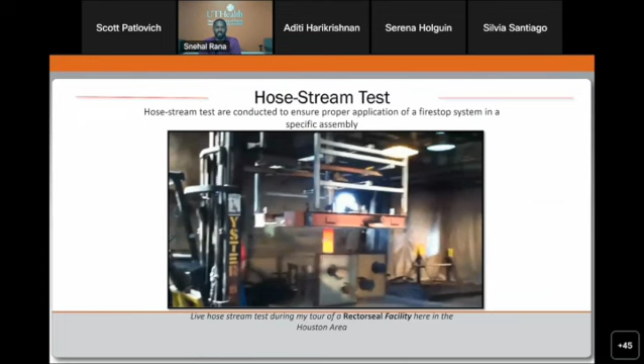So as they do testing, this is the hose stream test. Earlier you heard Cedric talk about the ANSI and UL testing that's done. Here in the Houston area, there was a RectorSeal facility that I visited some years ago, and they go through the process of putting different types of equipment, different types of material in, and they put the hose to test.

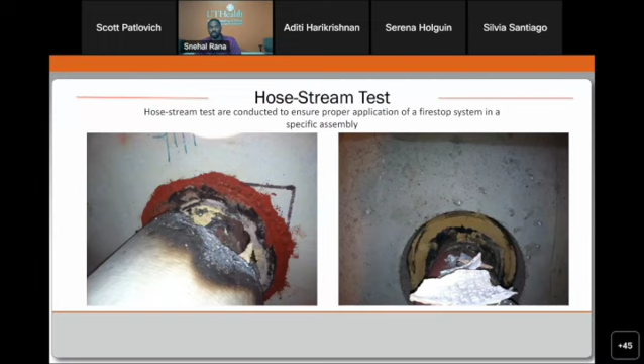That metal rod there was heated up to, I believe, 400 degrees Fahrenheit as they were doing that specific test. And this is just kind of the end result of it. One had insulation, one had pure piping, and one held very, very well, while the other was actually compromised.

So at the end of the day, we have all of our systems here. Just giving you a quick run through again. Passive fire protection systems are stationary materials designed to prevent the spread of fire and smoke, while active fire protection systems are always taking action. Passive fire protection systems help keep the fire in its original area, therefore stopping the spread of fire to the other side of the building.

These systems, for the active side, they deploy once fire, smoke, or heat is detected. Then these systems are designed to help combat the fire and help put it out. And lastly, these fire protection systems are typically built into your building—we're talking about passive fire protection systems—whereas active fire protection systems are typically installed based on certain legal criteria such as occupancy and building size.

So I know most folks always say active versus passive. Well, really it's active and passive, because they ultimately work together interdependently to forge a formidable fire system.

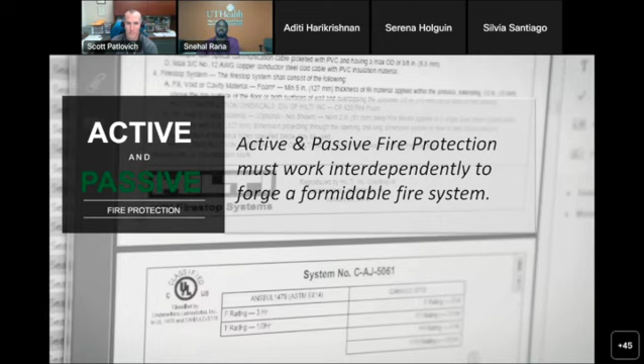Thank you all. I know I saw some questions out there. Yeah Christopher, great job, two questions came in. First one is, if you have a chemical fume hood equipped with a fire suppression system, how are these tested?

A chemical fume hood equipped with a fire protection system, say like a sprinkler system—is that where they were going? Yes. Okay, how would you test that fire suppression system? This is Linda Vadura. We actually have some hoods, they don't have sprinklers. They have some sort of dry chemical fire suppression system, and I'm not aware these have been tested. So I wanted to know how you guys test those if you actually have them.

Something's coming to mind as you're saying that—is it much like your kitchen range hoods? Have you ever dealt with a kitchen range hood? It has a dry chemical component to it, so that if a fire does go off, it melts away the fusible link and it engages. Of course it has a manual pull to it as well. So that's what I'm kind of getting from what you're saying. I would have to go back and actually check to see how those specific areas are maintained. That was a really good question, we'll find out for you and give you an answer here.

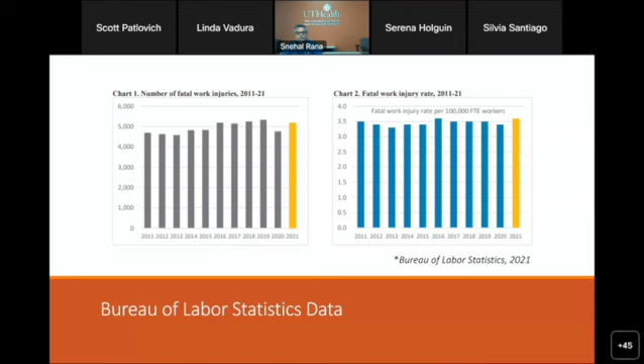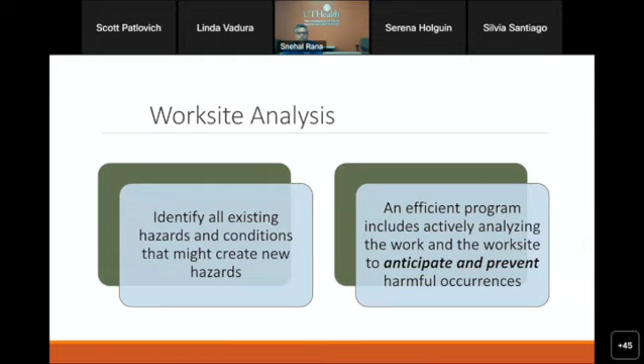An efficient program includes actively analyzing the work and the work site to anticipate and prevent harmful occurrences. It's important to realize not only what is currently a problem, but what could be a problem in the future. For example, if somebody goes from point A to point B walking through a warehouse full of moving machinery, that's an obvious hazard. Make sure you are able to foresee potential hazards that are similar, and eliminate or minimize those as well.

For hazard prevention and control, triggered by the determination that a hazard or potential hazard exists, when practical, prevent hazards by effective design of the job or job site. This is probably one of the best things to do if you have the funding for it, because just by changing a job site, you can eliminate that particular hazard.

Where elimination is not feasible, perhaps because it's cost prohibitive, control hazards to prevent unsafe and unhealthy exposure. Elimination or control must be accomplished in a timely manner. So if you find a deficiency, or during a risk assessment you identify something, make sure you communicate that right away and create a program in place and educate everyone who is part of that process.

For occupational safety training, address the safety and health responsibilities of all personnel. Make sure nobody is unchecked or missed - it might be housekeeping staff, or a student intern who comes in once in a while. Make sure you're not missing anybody who is not regularly there. Ensure all employees understand the hazards to which they may be exposed and how to prevent harm to themselves and others.

Educate and reinforce management's role in safety and health responsibilities with leadership. Sometimes when you put a program or policy in place and you put the responsibility solely on the worker and EHS, taking leadership out of the equation, you want to make sure leadership also has some follow-up involved - like reminding someone to wear their PPE or goggles, or not to do a certain process, or not to throw something away improperly, or not to put sharps where somebody could get injured.

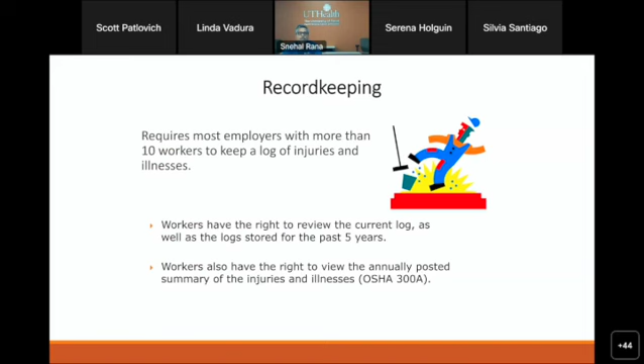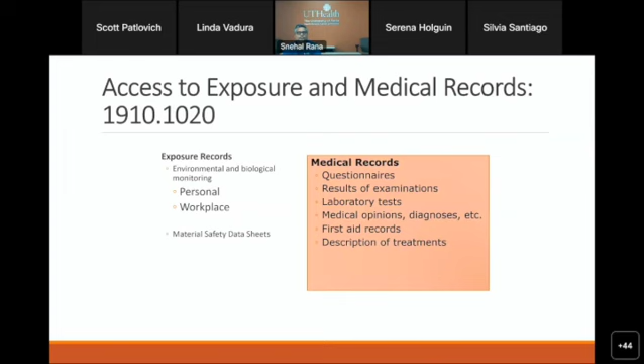Make sure employees have access to medical records in the event they do need it - questionnaires, results, lab tests, and any other important information. The hazard communication standard ensures that employers and employees know about work hazards and know how to protect themselves, so that the incidence of illness and injuries due to hazardous chemicals is reduced.

Again, this HAZCOM standard is required to minimize injury and death from occupational exposure to hazardous chemicals in the laboratory.

Make sure you have a chemical hygiene plan in place that is capable of protecting employees from health hazards associated with hazardous chemicals in the lab, capable of keeping exposures below the required limits. Make sure you have an SOP - standard operating procedure - employee training, and whoever your chemical hygiene officer is, make sure they are regularly revisiting this. These plans should be readily available to employees and employees' representatives in the event they have any questions on it.

The bloodborne pathogen standard exists to prevent needle sticks and other exposure at work to blood and body fluids that contain blood - and again, these are the responsibilities of the employer.

Asbestos Hazard Emergency Response Act, or AHERA. For any type of work where you have asbestos, employers need to make sure that a management plan exists for the location, conduct regular inspections and assess conditions of the asbestos-containing building material, or ACBM, provide training for custodial staff on a regular basis, and cover state and local workers who perform asbestos work who aren't covered by OSHA.

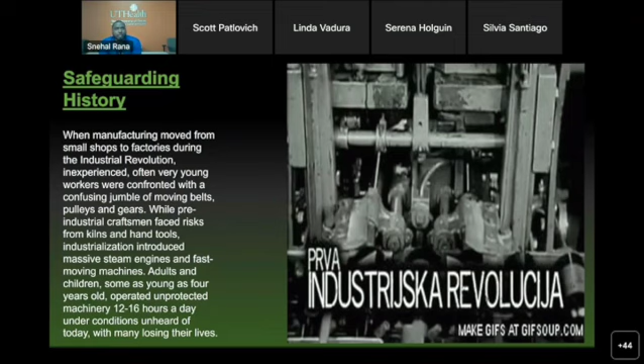So just to start off, there's a little history behind this. Before the Industrial Revolution, most people worked in little mom-and-pop shops dealing with hand tools and similar items, where people might have just had little nips and cuts here and there. But as the Industrial Revolution began, people were being introduced to large machines, trains, and all kinds of manufacturing machines that people were not really aware of. These caused a lot of problems because people were not really trained on how to operate these machines.

So we had a lot of incidents where people's limbs were getting cut off, and even fatalities. Some of the sad things about it too is that they even had children, as young as 4 years old, working in some of these factories, some of whom were losing limbs and losing their lives as well. Because of this kind of situation, and other situations you might have seen on History Channel, where back in the early 1900s or so you might have seen guys working on top of buildings with no kind of fall protection or anything, there was a great deal of people falling from certain heights.

So because of these reasons, that's why OSHA was signed on December 29th of 1970 by President Nixon.

And so OSHA played a part in being able to get out to these job sites and construction sites and begin to implement safety factors that need to be taken care of so that people can be safe and hopefully people can get back to their homes and get back to their loved ones safely.

So the next clip we're going to have is just a small video about the dangers of machines and what can possibly be done. We're not going to watch the whole video for the sake of time, but we're just going to get a little glimpse of how dangerous machines can be. And I do want to apologize, there may be a couple of little clips in here that may be a little bit too much, but hopefully not too much that you cannot watch.